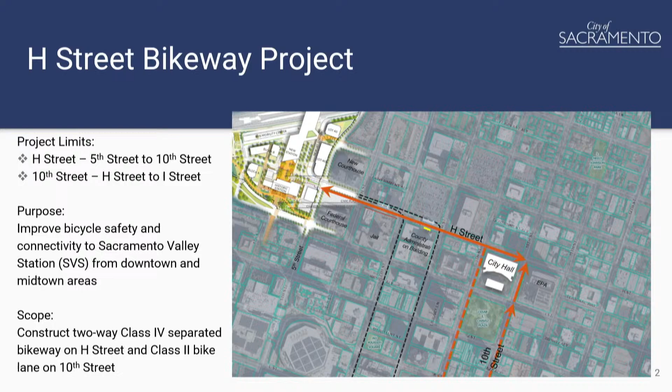The Bikeway project proposes to meet this purpose by constructing a two-way Class 4 separated bikeway on H Street and a Class 2 bike lane on 10th Street.

Oops, went too far. Sorry.

This project is part of a larger package of projects that will complement the Sacramento Valley Station area plan. The city received a grant through the Transit and Intercity Rail Capital Program, also known as TIRCIP, and we received an award for several different projects, including the Bus Mobility Center, the relocated bus loop, the double tracking of the light rail on H Street, as well as this H Street Bikeway.

You'll hear more about some of the projects going on in the Sacramento Valley Station in the next item on the agenda. But to deliver this project, we're coordinating with all these projects, and in particular with Sacramento Regional Transit, as their project will be overlapping within our project limits. We'll also be coordinating with Sacramento County, who has the new county courthouse, the jail, and their administration building. And also along this corridor is the federal courthouse.

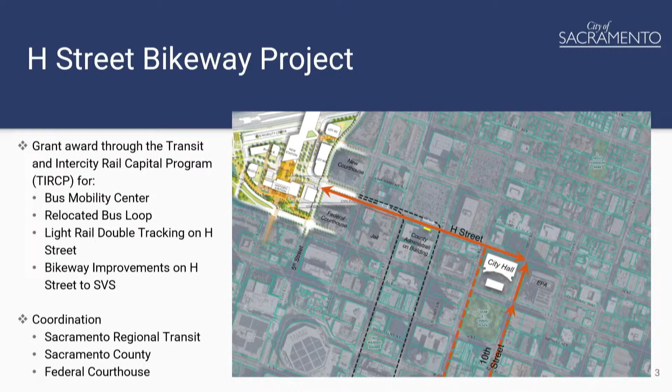So I'll just quickly go through what we're planning on each block. The first block from 5th Street to 6th Street, we are proposing to do a lane reduction from 2 lanes down to 1 lane in order to put in the bikeway. On this block, the Sacramento Regional Transit is planning to double track, so we'll be coordinating with them on their second track. We'll also, at the intersection, construct ADA compliant curb ramps where they're needed, and the other compliant curb ramps will remain. And we'll also ensure that audible signals are installed at the traffic signal if they are not existing.

Between 6th Street and 7th Street, we're proposing to continue the lane reduction. On this block, the travel lane will be shared with the second light rail track, and we're putting in a right turn pocket to accommodate the need. At the intersection, we'll be putting in a separate bike phase at the traffic signal to avoid conflicts. The bikeway along the south side will be separated from the roadway, from the travel lane, by hatching and vertical posts.

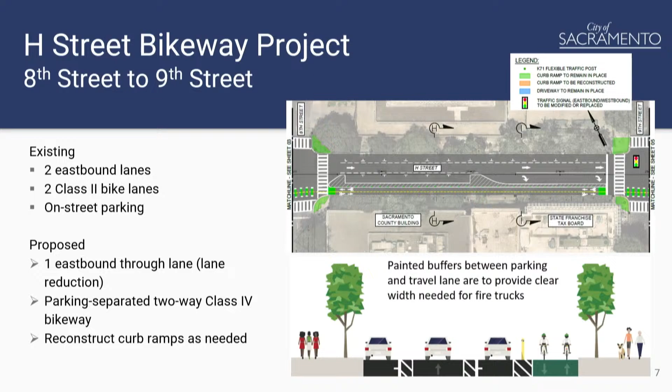From 8th to 9th, we will continue with our design with the parking separated bikeway and with ADA compliant curb ramps and audible pedestrian signals at the signals.

From 9th to 10th, which is right outside City Hall, we're going to be doing something a little different here. The two travel lanes will remain, but in an effort to maintain the heavily used loading zone out on H Street, we're proposing to reconstruct the curb line to bring it out towards the roadway. At this location, we are proposing to construct a sidewalk level bikeway.

So the bikeway will be separated from the existing sidewalk with the existing tree line there and the planters. But at the loading zone, I have an example. We'll do another treatment to ensure that there's a color difference to distinguish between the bikeway and the sidewalk, and also put in some kind of domes or other treatment to ensure that people with canes can detect them. The exact treatment we use will be determined during design.

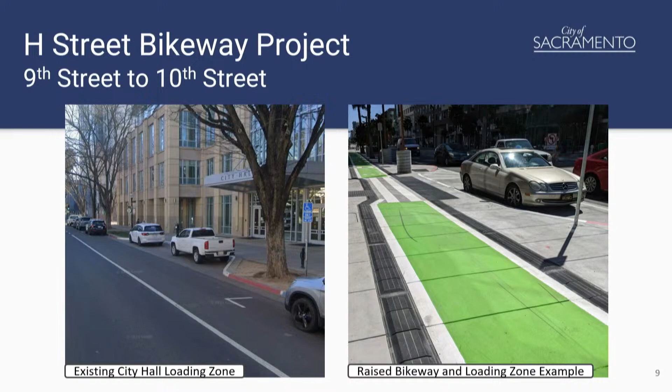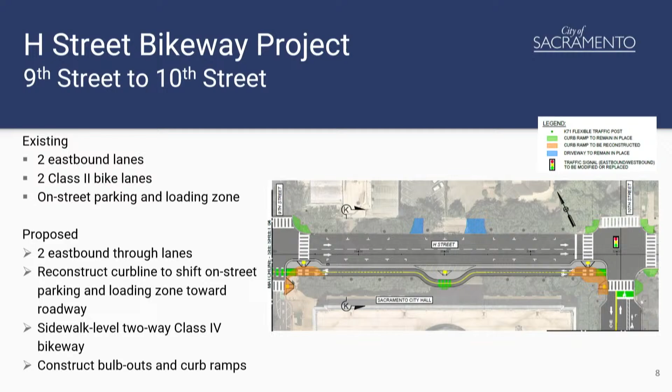Also, at the corners, we will also be putting in bulb outs that will shorten the crossing length. And then finally, on 10th Street, we're just putting in a buffered bike lane. This will allow us to connect the existing bikeway on 10th Street that currently ends at I Street. So this will provide a connection in our network so that we can connect all the way to the station.

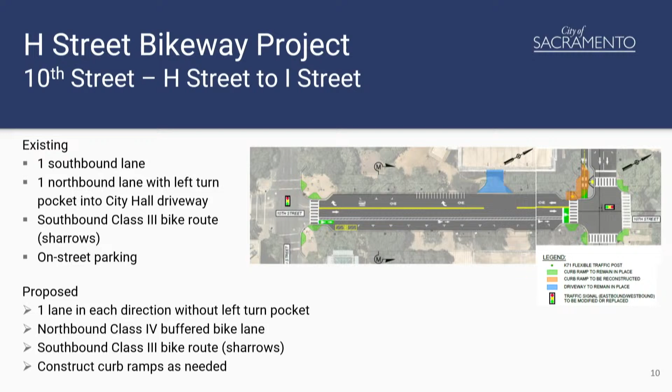Our schedule right now is that we are working on completing our preliminary engineering. We're hoping by the end of spring to have that done. Then we'll be able to move into final design, which will last approximately a year to 18 months. So, any questions?

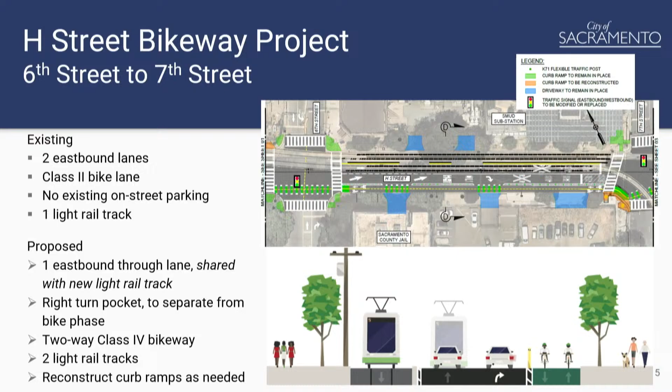And then there's, one of the cross-sections is, for example, at 6th and 7th, the sidewalks are as narrow as 4.5 feet in some of the blocks. The proposed designs do improve this, but is there a minimum proposed sidewalk clear width after accounting for signal poles, light poles, planters, utility boxes? Where are those measurements starting and ending?

We will make sure when we're doing the design that we meet all the clearances. I believe 48 inches we need clearance. But we will make sure that any poles we put in, or any other equipment, we will maintain the clearances that we need.

And that clearance is just the minimum for the ADA? We will try to do as much as we can, but we will definitely meet the minimum. Yeah, yes, indeed. Okay, thank you.

Thank you, commissioners. I think, to Commissioner Pullen's point, doing more than the minimum is good. And I believe, if my memory serves, city ordinance is above the minimum for ADA compliance, but it's like an average. So when there is a pole or a box, it can shrink down to the ADA minimum, but typically it's a little more than that. Like you're saying, we try to do the maximum clearances, but given the age of our city and our infrastructure, sometimes that's not feasible.

But we appreciate that, or at least I do personally, and I really appreciate this project. I think this is long overdue in this corridor, especially around the Sacramento Valley Station, having better connectivity to that hub, especially hopefully someday high-speed rail will be coming in there. With all the intercity connections, light rail improvements, and eventual streetcar, this is a really major transit hub for our city. I really appreciate this project personally and as a member of this commission.

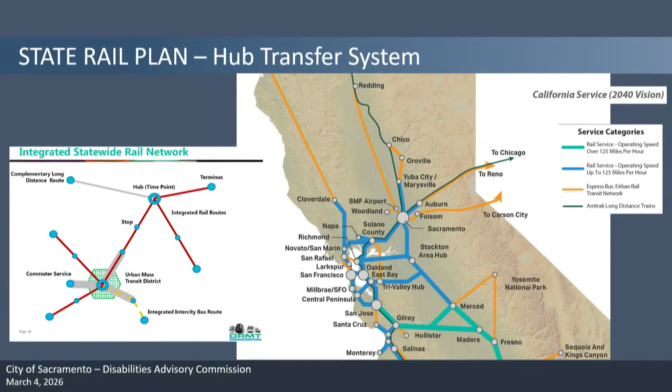That state rail plan had this map that looks at trying to bring coordination between the rail system and hub stations, with the spokes being the networks of buses primarily reaching all points in Northern California, in our case here, focusing on Sacramento. So this map and diagram represent that from the state rail plan. We've worked hard in our projects, the ones we've applied for in TIRCP, to fulfill the mandate the state's laid out for Sacramento Valley Station. So the station has its own local purpose, but it's also very much a regional and Northern California station.

Also want to introduce the context for development around the station. This slide indicates the projects that have been in the pipeline. Some have been completed now, but it gives the overall picture that within a half mile, the gray-blue shaded area, and three-quarters of a mile, that line, significant projects are coming online coincidental to us expanding the station, which isn't an opportunity many cities have.

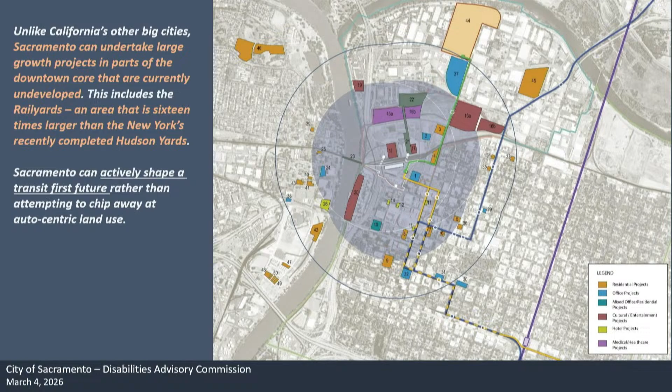The rail yards in particular, with its 240 acres for infill development, is one of the unique opportunities we have in this country, and we're trying to build that and keep up with it as fast as we can in expanding the station and meeting the need. Some of the projects in the rail yards coming online are indicated in this diagram. All of them are moving forward.

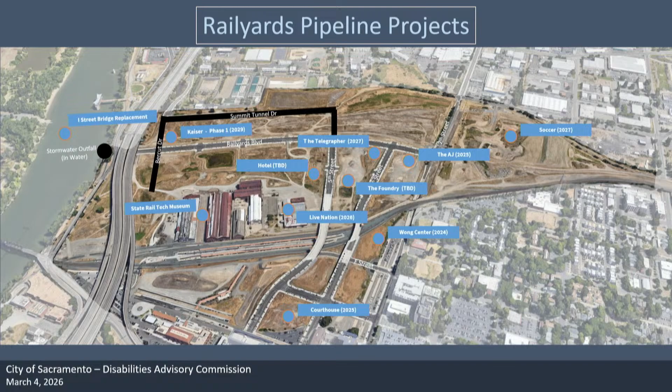We have Kaiser up - at the top there, as many of you may have seen from the freeway, it's under construction. We're actively working through the soccer stadium. The main road infrastructure has been put in place, and then we are focusing now close to the station on the central shops area. This gives you an overview of some of the projects coming online.

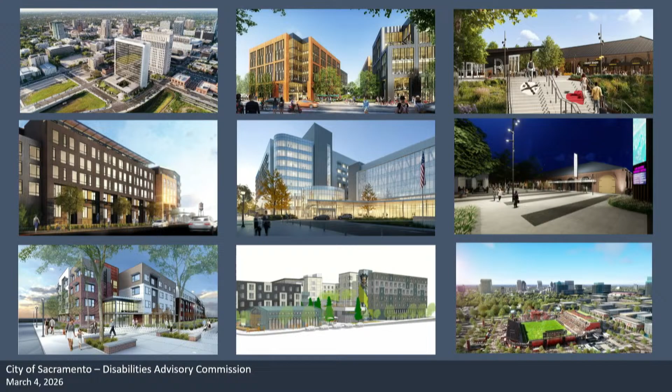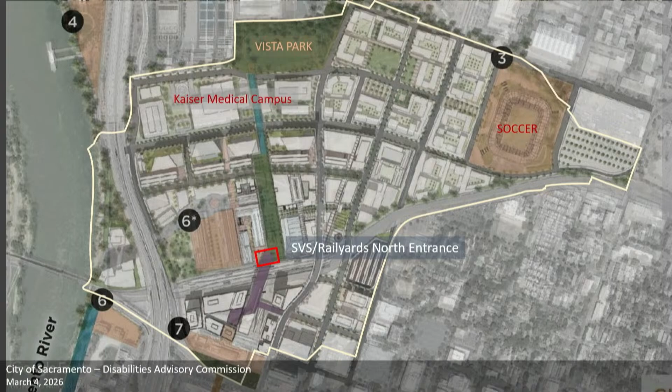There's a little more detailed plan area, showing the connection on the left. I'm sorry, this rotates - so north, which had been up, is now to the right. But you can see in that illustrated diagram to the left the tunnel, stairs coming straight forward in the axis, and then an accessible ramp winding back, very nicely landscaped. There's graphics that will be cast into the concrete relating to the history of the railroad.

And then we have the whole plaza that connects to Telegrapher Avenue, which is in the second image to the right, is to the far right there, that street. The plaza will be maintained by the development company with our community facilities district, and then we have an irrevocable easement for access to the station through that plaza via Telegrapher, and then coming from Fifth Street that comes up from the bottom of the image into that main spine.

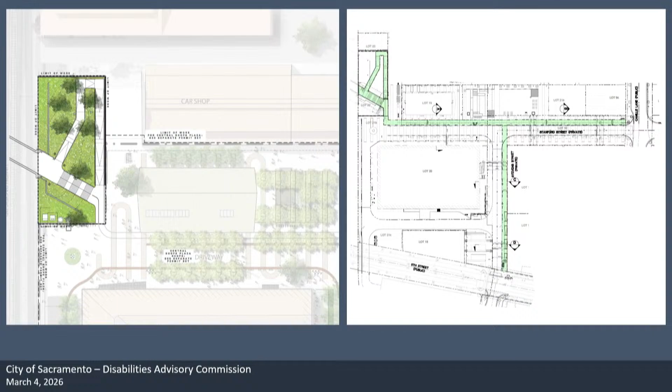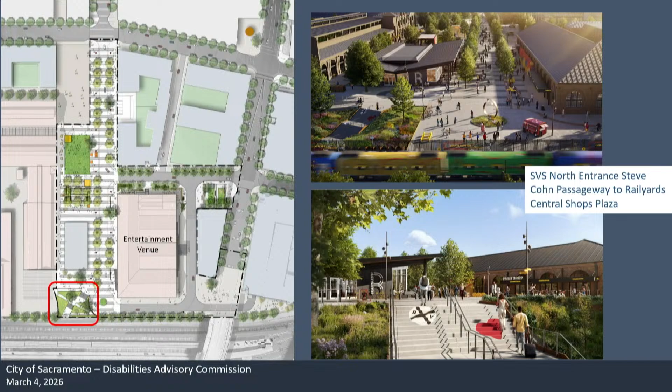So this gives a little better picture of what it's going to look like. You're seeing the stairs coming up, and an overview of the aerial with the reimagined paint shop building, which was the oldest structure on the site, being refitted as an entertainment venue for Live Nation, up to 4,000 capacity. It's going to be quite a dramatic change, opening a new door to Sacramento Valley Station without us having to do much on site - we get a new connection to the station. That's in construction, it had been presented before, so I just wanted to update you on that.

And then I'm going to talk about our access into the station, picking up on the 8th Street Cycle project and some others as well. The area plan focuses on a very pedestrian-focused, transit-focused approach, and the car is allowed to come in, but it's diminished.

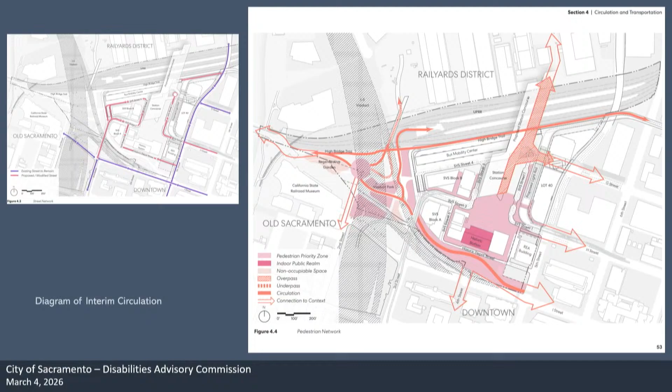I'm going to talk to you tonight about the loop on the right side, contained in this image from our plan that shows light rail as it comes in on the right.

I was planning to have a pointer, so I'm going to have to just talk this through. Move that mouse to your right. Over here? You might be able to point out there. It won't really. All right, that's perfect. Great, thank you. Okay, I'm going to leave the cursor there.

Currently light rail comes in behind the station and stops, as many of you who have been there would know. This has long been on the books and in planning since 2003, before the city purchased the site. Light rail was to be redirected in a north-south direction, along the eastern edge of the site.

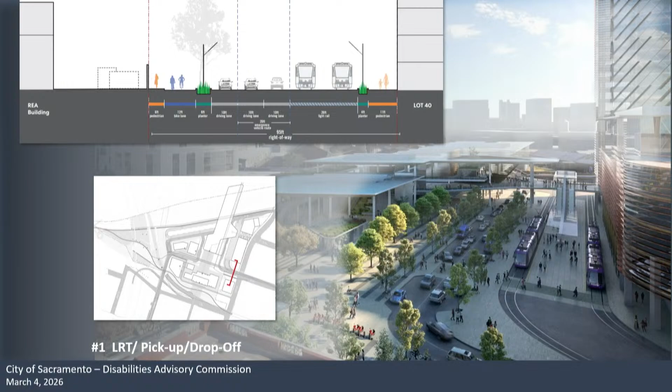And we are now bringing in a new pickup and drop-off loop, and I'm going to jump to the next image to show that diagram. This better shows it here.

Directly to the west of light rail, this will allow more direct access to the pedestrian tunnel.

I'll come back to this image, but I'm just going to jump to this diagram first. You can see currently we have about just under 1,000 feet for folks dropped off at the front of the station to make their way through the station, out to the passageway, and to get to the center of the platforms. From there you have to go up to the track, so it's even longer than this. But this new drop-off point will allow almost half that distance directly to the tracks.

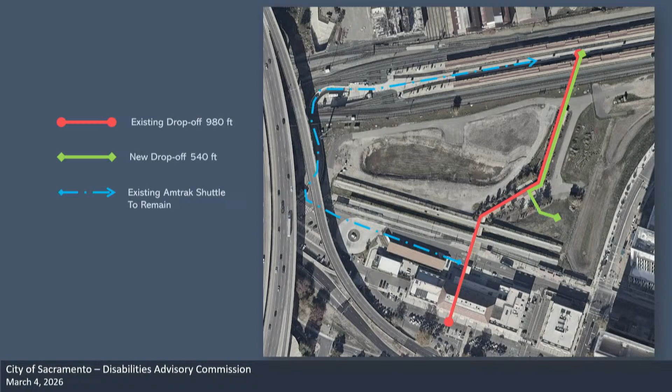Currently Amtrak provides a service for folks who prefer not to or cannot make that distance, with an electric shuttle that picks up at the North Plaza. That's intended to remain as that service, but this provides another point of access closer to the station.

I'm going to go back here. Commissioner Barnbaum, I think you'll be interested in this, and to your question, you can see in the orange shaded diagram that from that point and to the west of Fifth Street will be accommodating the cycle track access into the site.

So this pickup and drop-off loop, which we're just going to be starting design on shortly, will be the receiving end of the H Street cycle track.

I understand you're well aware, having been down there today, we have a lot of conflicts. Despite all our attempts with signage and increased enforcement, we still have people driving back to drop off vehicles, and we have the overlay of bicycles as a throughput. It's going to be difficult, but we're being vigilant. This will improve access because we'll try to get people in this project to enter on the north side of the roadway, and deal with the pedestrian crossing conflict in more of a sidewalk condition where we can control it better. Right now the open roadway is kind of free-for-all and people just zoom through, so we're very conscious of that and will keep it in mind.

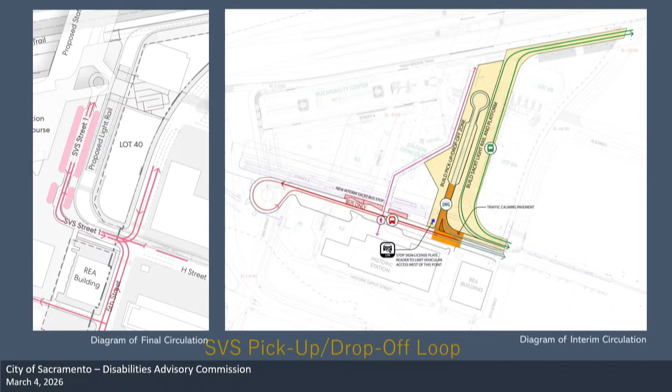With this project, the existing bus stops will be shifted slightly to the west, but the 3 bays maintained. As Cecilyn mentioned, we're working to coordinate these projects together with the light rail project, so they can go in concert and be managed well, hopefully expediting the overall construction timeline.

I wanted to also point out another project we received funding for in 2022, cycle 7 TIRCP project. We've had successive projects since cycles 4, 5, 6, and 7, receiving funding every 2 years. This one is for what we call the West Side Access Project, a segment of Bercut Drive that is now constructed. I'll try the cursor again.

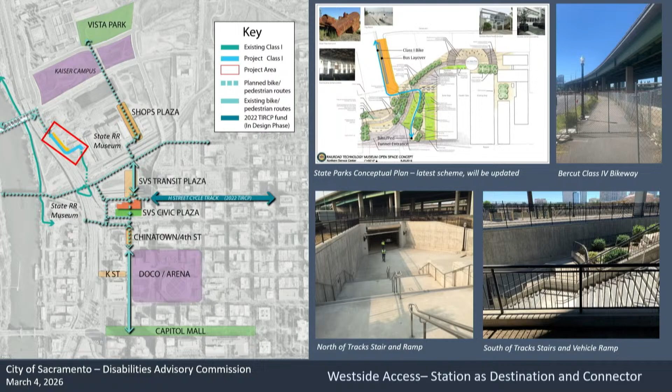From this intersection of Bercut and Telegrapher, the street currently stops there, and we were able to get funding to extend the remaining 400 feet south, bringing the sidewalk and the class 4 separated bikeway down to the cul-de-sac. We've also expanded the program to increase the circumference of the cul-de-sac so that SAC-RT buses can turn around, with a layover on the east side of the turnaround, indicated here in yellow striping.

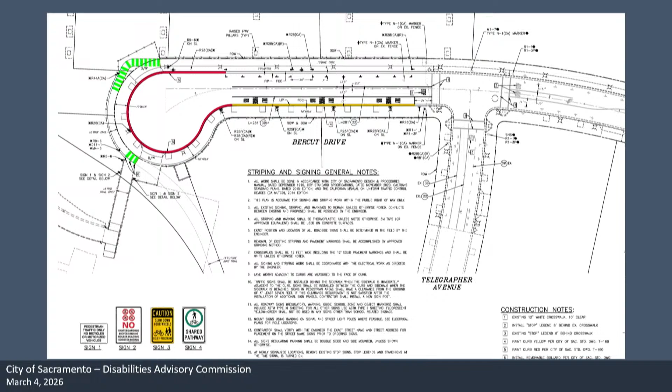So we're in preliminary design. This is being designed by the developer, and the funding will go to them for construction, as with the north entrance I showed earlier. The point here is that we get 3 buses to layover at end of line, and we provide a restroom for the drivers for servicing. It will work out great for the future when the Railroad Museum and other programs expand, so if you have school tours, you can gather your kids at the end of the line and board the bus without waiting for it to zoom off. I think it'll support access to the waterfront and be a great asset for everyone here. So that's currently in early design, and the intent is to be out with construction on this by next year, by the developer. It's moving quickly, but I'd be glad to take any comments back with me on that.

Thank you so much for this awesome presentation. One last project. Oh yeah, go for it. Sorry, that's okay, I know it's long, sorry.

So the last one I want to present tonight, also part of the hub and spoke process, is that we are designing for construction 17 new bus stops in the Midtown-downtown area, primarily for the regional commuter buses. The diagram to the upper left was a study funded by TIRCP in 2020, led by SACOG, and the city is now implementing it through a separate grant for engineering design and construction. Regional agencies such as El Dorado Transit, Amador, and Roseville Transit all have their own stops around the city—there were 34 stops at the time of the study. We're making that a more efficient, identifiable route, reducing the number of stops from 34 to 17, but allowing them to overlap so that nowhere is there more than a seven-minute walk shed within the main employment areas. Those are the 3 diagrams that show that.

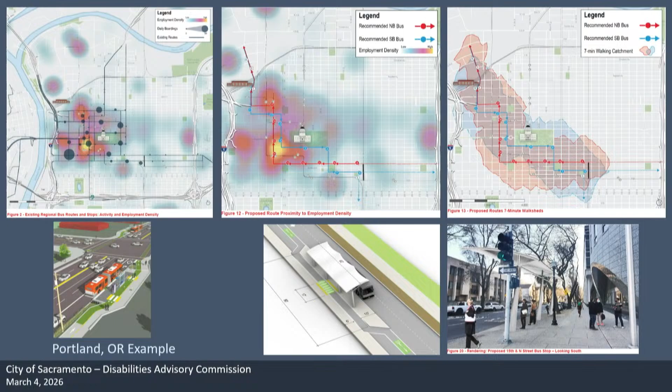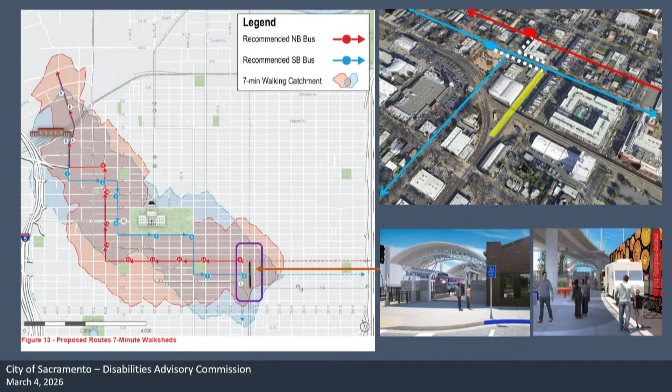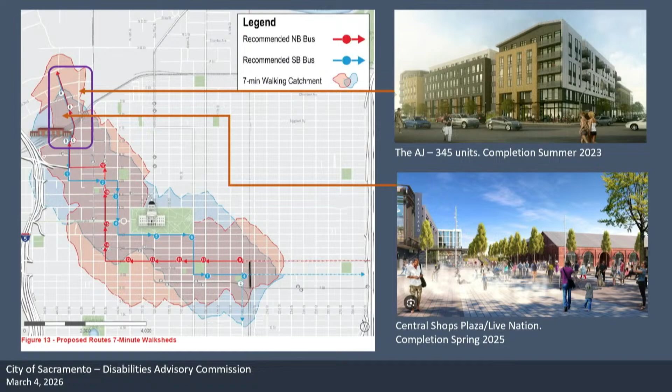We have a similar condition here. We're actually moving the bus stop into the parking lane to engage with traffic on two-way streets, so that buses aren't pulling in, getting trapped, and having to pull back out into traffic. It works sort of like a BRT, but it's not a BRT route. That's illustrated here in the middle, and I've got a larger image to show you. This will connect and feed into the Valley Rail Station in Midtown at Q Street, with stops close by. Then as we go up over the tracks and outwards towards Richards and the River District, we pick up some of the housing projects and the plaza I just spoke about in the rail yards.

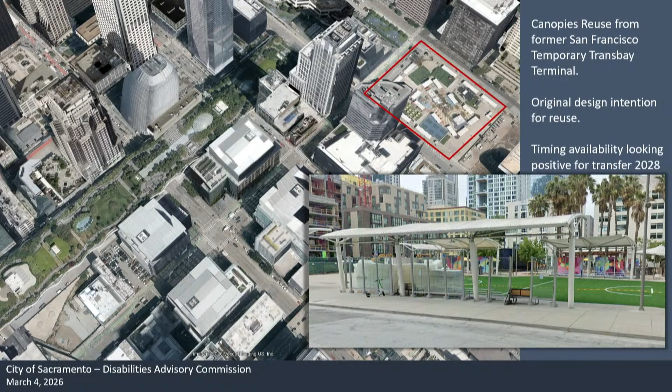One unique piece is that I've been working on this for about 5+ years. The canopies that were used at the temporary Transbay site in San Francisco during construction of the Transbay terminal are shown in that park—the rooftop park to the terminal. You can see, indicated in that red square, all the canopies in a street view. They're still being used, now owned by the city redevelopment agency, but we're on course to coordinate the reuse of those and bring them to Sacramento. That was part of the grant application and included in the grant to reuse those. They were designed to be reused, and we're going to take advantage of that. We think they have a really great character and fit well into the Sacramento streetscape.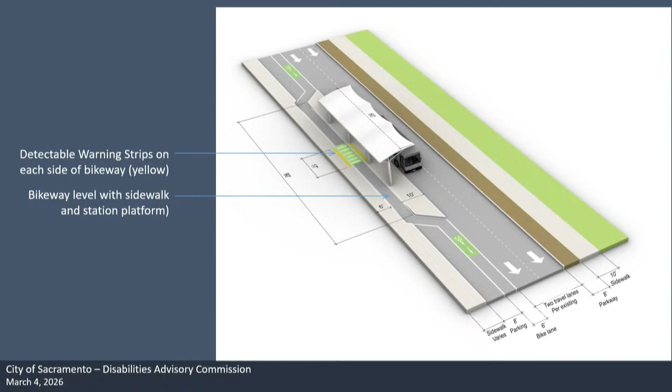So I'd be glad to take any other additional comments, notes, or concerns on this design with me to the design team. Lastly, we're finishing up a 15% set to identify all the issues and get early cost estimates. Now we're going into detailed design this year and into next year, and be ready for construction in '27 to '28. So that's the conclusion, and sorry for the length of the presentation.

No, not at all. Thank you so much for this very detailed and comprehensive presentation that goes even far beyond the actual physical footprint of our Sacramento Valley Station.

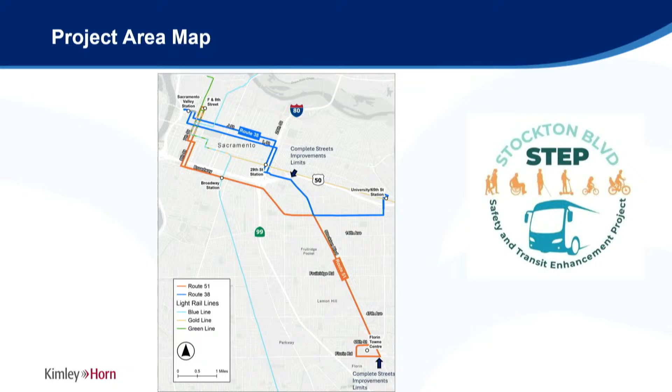At the beginning of the project, we worked to establish a vision of the corridor. It's got some key elements, including safety, multimodal, being able to develop and deliver a premium transit service, developing a sustainable project that is going to be durable in changing climates and adaptable, and also looking at a project that's really geared towards the community, being able to facilitate access to opportunities and to create an inviting and safe environment for all. We took this vision and began to develop it into some specific purpose and objectives.

Beginning with improving safety, there's a pretty poor safety record, in particular in the Stockton Boulevard corridor. So it is an intent of this project to develop improvements to reduce the number and the seriousness of crashes in the corridor. We want to improve the multimodal infrastructure to provide a safe environment to walk, to cycle, and to access the transit service in the corridor.

We want to build upon the existing transit ridership that already exists in the corridor through providing a more premium transit service. Through these measures, we hope to be able to support economic development and provide access to opportunities, to jobs, to education, to services. Finally, we want to be able to build the project, so we're trying to develop it to be fiscally responsible, so that it's going to be cost effective and that it will be able to advance into future phases of implementation.

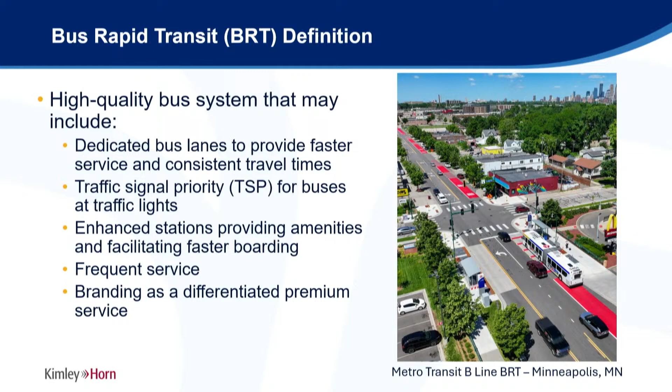As I mentioned, we're looking at two alternative BRT routes. Alternative one follows the Route 51 alignment along Stockton Boulevard to Broadway, and then it makes its way into downtown along 7th, 8th, and 9th Streets. Our alternative two is our Route 51, Route 38 hybrid alternative, which runs along Stockton Boulevard to T Street and then comes into the Midtown and downtown through 29th and 30th Streets and J and L Streets.

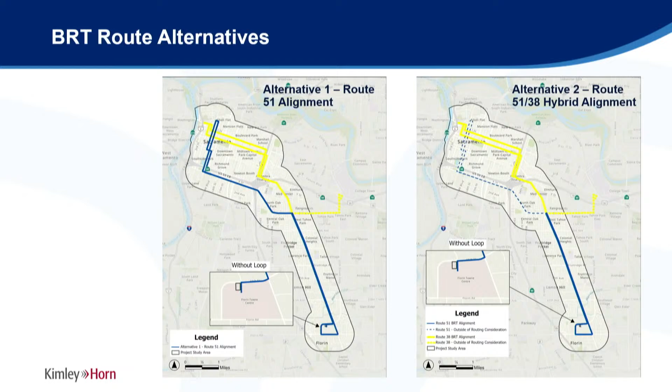Transitioning now to complete streets, and a high-level definition, you probably know this, maybe a little preaching to the choir here, but complete streets are roads that are designed to be safe for all users. The goal is for the street to be comfortable and accessible for everyone, no matter their mode of travel or their abilities. Components of complete streets could include bike lanes, wider sidewalks, improved pedestrian crossings, and dedicated bus lanes. Those are all things that we're looking at.

We're also looking for input on a travel mode hierarchy as we're going around and conducting our outreach for the project. What we've defined here as the travel mode hierarchy starts with the most susceptible users in the corridor, with folks that are walking and rolling as the highest priority, then working our way down to cycling and micromobility, followed by public transit, with vehicle travel being at the bottom of the travel mode hierarchy. This is a reimagination of the Stockton Boulevard corridor, which is heavily geared towards automobiles today, and that has been its function over the years.

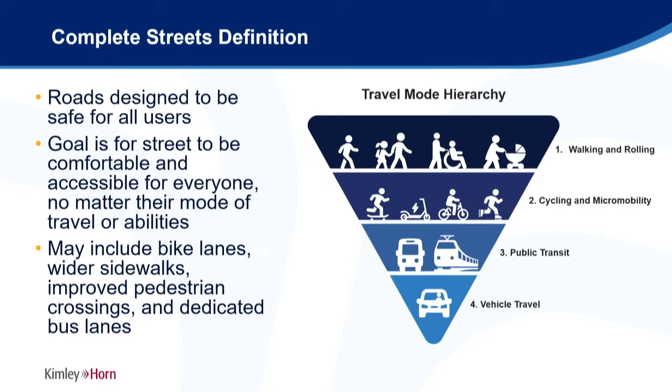Now I'll walk through a sample corridor segment. This is a segment of Stockton Boulevard between Elder Creek Road and 20th Avenue, approximately 1.7 miles in length. We've divided the corridor into segments to try to imagine what type of improvements could fit within the space that we have to work with, and starting to consider some of the trade-offs within that available space.

At the back of the sidewalk, there are often trees or utilities, which can make it challenging to widen the sidewalks. The corridor also has a high prevalence of driveways with a lot of open spaces that detract from the pedestrian experience along the corridor.

We're going to show a few alternatives that we've developed initially here for consideration for this section of the corridor.

The first option we're showing here, alternative A, primarily just looks at reallocating the space between the existing curbs along the corridor to introduce dedicated bus lanes and wider bike lanes than what's out there today. With this alternative, we would look for opportunities to widen the sidewalks in areas where there are obstructions out there today.

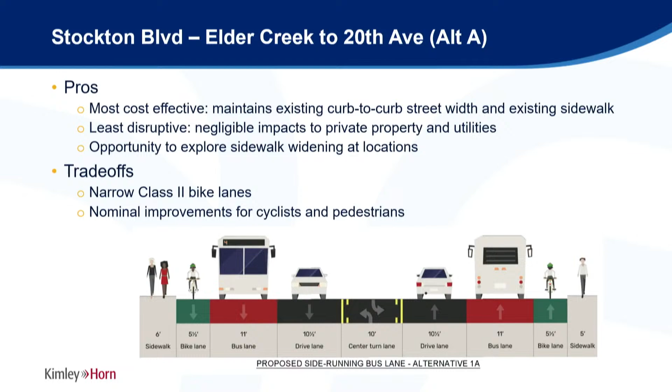Alternative B looks to some additional capital investment to improve the conditions. What's shown here is the introduction of a shared use path on one side of the roadway. It would be approximately 11 feet in total, but 2 feet of that is consumed by the shoulder. With this alternative, we also limited the improvements to the existing back of sidewalks to avoid major impacts to utilities and other obstacles that exist behind the sidewalks.

Some of the trade-offs with this are a higher cost, more extensive construction with sidewalks and curb ramps along the corridor, and reconstruction of a number of driveways. Some utility relocations would also be required. There's also the constraint that it's a relatively narrow shared use path, and there's not an adjacent on-street bike lane with this option.

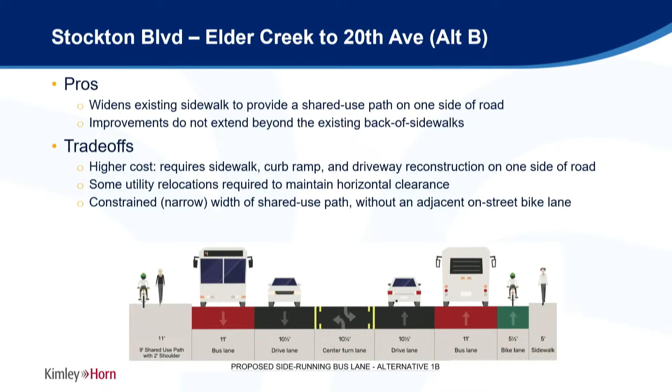It requires widening of the road on both sides to accommodate the sidewalks and extensive driveway reconstructions, and a lot of conflicts between the existing back of sidewalk would need to be addressed. There would be impacts to trees along the corridor as well as utility relocations that would need to be addressed.

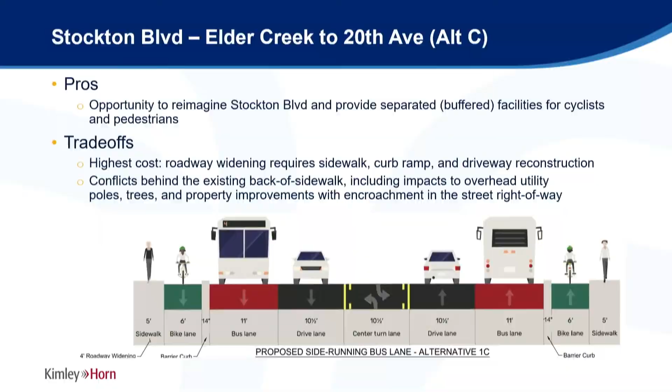Transitioning now to an update on the project status. As mentioned at the outset, we're currently in the alternatives analysis phase and are looking to complete this phase by summer of 2026 by selecting the preferred alignment of the BRT route and narrowing down the complete street improvements in the corridor, to have a project defined enough to advance into the environmental review phase, which would begin in the second half of 2026 and extend through 2027.

Only Stage 1 and Stage 2 of the project are currently funded, so as we begin to transition from Stage 1 to Stage 2, another item that will need to be addressed is identifying funding for future stages of the project. Subject to securing that funding, the project, if it remains on schedule, will then advance into final design in 2028 and 2029, and would be ready for construction in 2030 and 2031.